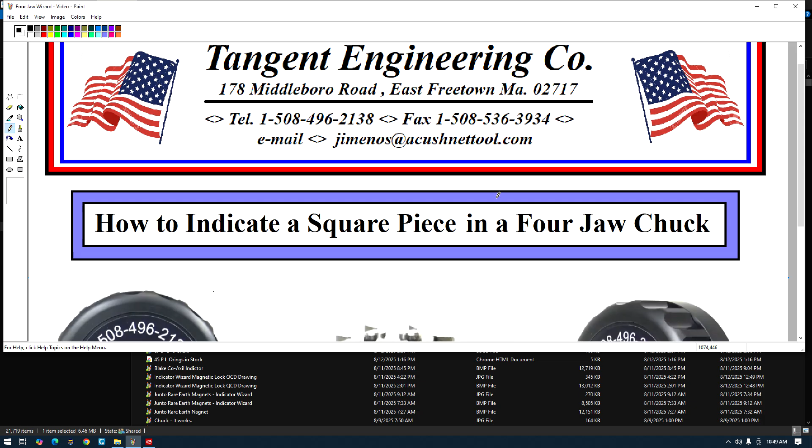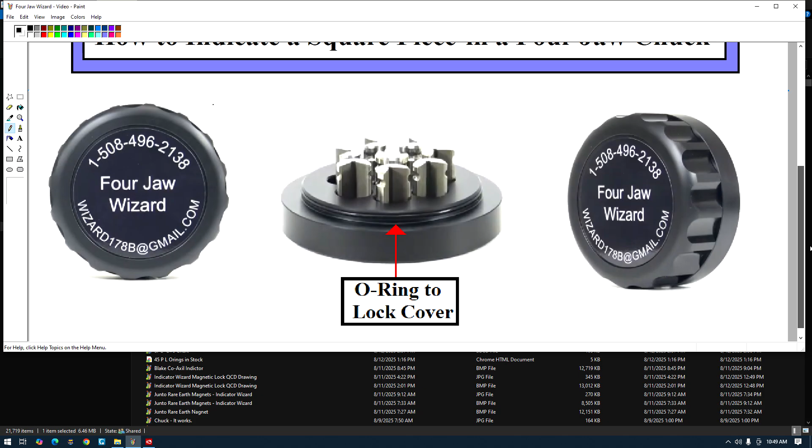Alright? Well, about 5 years ago, I developed this little product and I went to sleep on it. I put it to bed. Other shit got in the way and it laid on a back burner. Here's what it looks like. This may entertain you, right? I got a friend that I interact with. I sent him one of these, and I made a video so he would understand what the hell it was. What I'm going to do is play that video for you, and it may entertain you. All right?

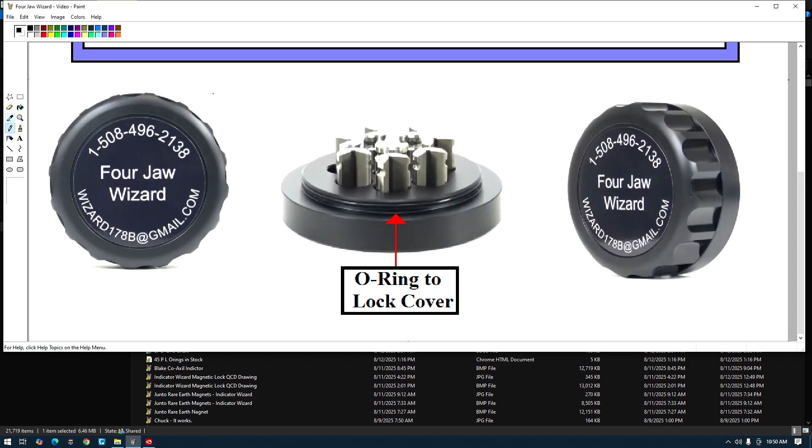Okay, we're off and running. Watch this. Hey, Doug, you'll never guess who this is. Take a look at that ugly motherfucker, that picture there. It's your buddy, the Grand Poobah. I just want to sign in. I'm going to lay some shit on you, okay? Hang on.

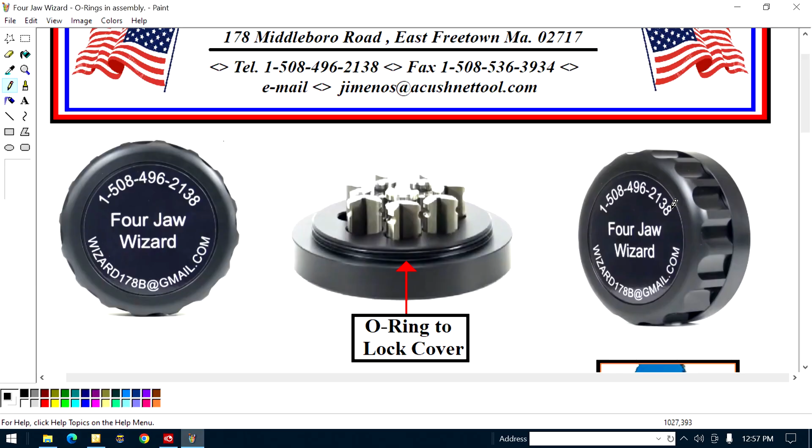Alright, I'm going to be sending you something we never talked about, alright? I know you're a tool junkie, right? You can see on the left it's called Four Jaw Wizard. I got 3 views: top view, an angular view, you can see them grippers there. There's a bottom half and a top half. When you take the top half off, you got these bosses in there. You don't know what the bosses are for right now, what they look like. I'm going to elaborate. Let me just blow this up.

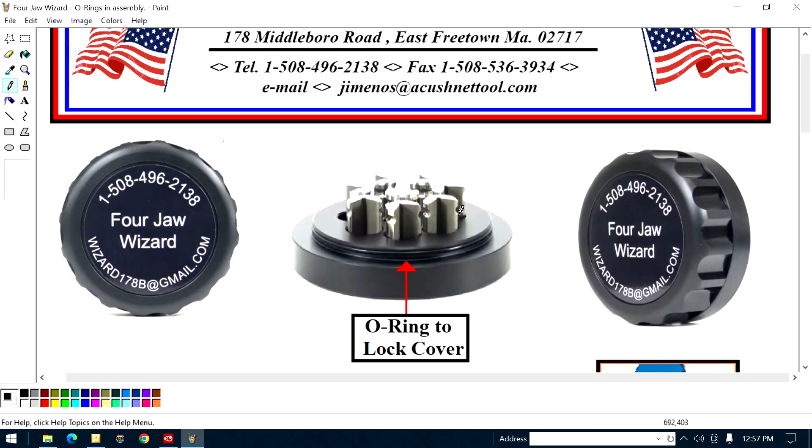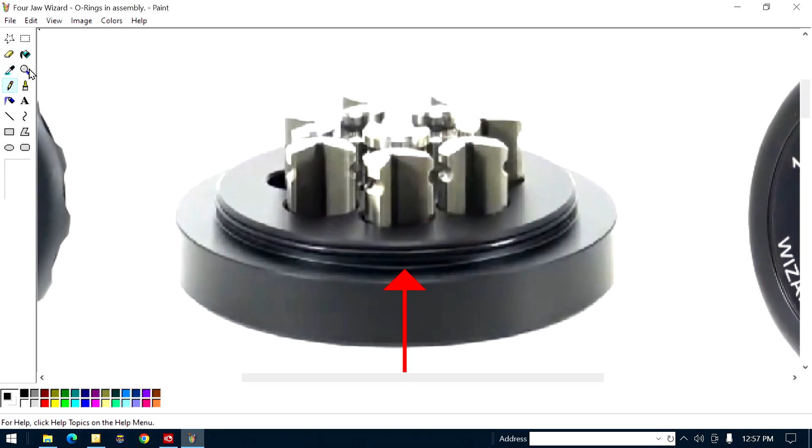All right, first of all, you see there's an O-ring in the bottom half. See, I got it highlighted. Why is the O-ring there? When you put the cover on, it stays on tight. The rubber compresses and holds it on so it don't fall apart and the bosses don't fall out. Sounds dumb, but that's what it is. Alright. Let me go over here. Let me blow this up. Well, it's too big. Let me blow it down.

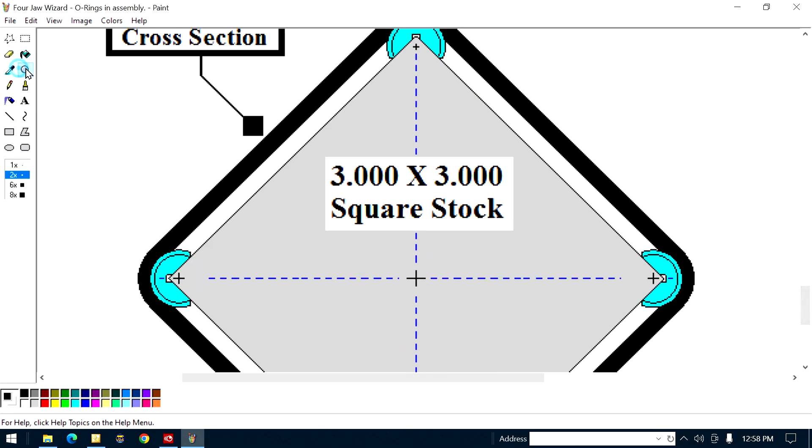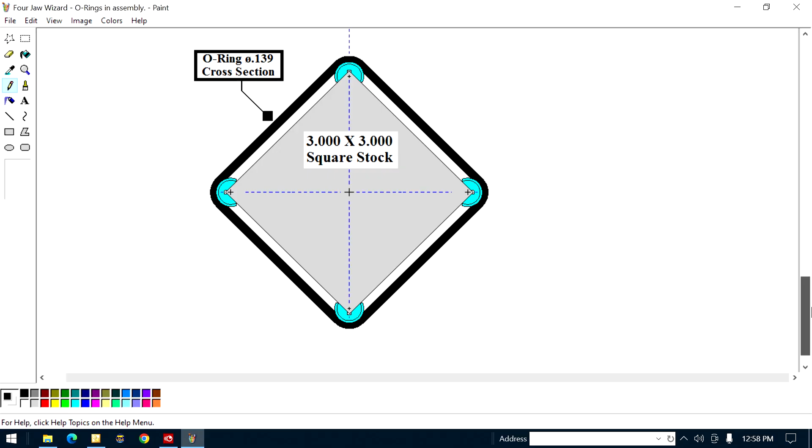When you're in a four-jaw chuck, this obnoxious tool is for when you want to put a piece of square stock or rectangular stock in a four-jaw chuck and get it running true. There's a lot of ways of doing this. This tool makes it a little easier. You see it here? What you got is them 4 bosses. I'm going to elaborate. And you got an O-ring. What's the O-ring for? The O-ring is to hold the bosses on the corners. You see it? Alright? Let me go over here.

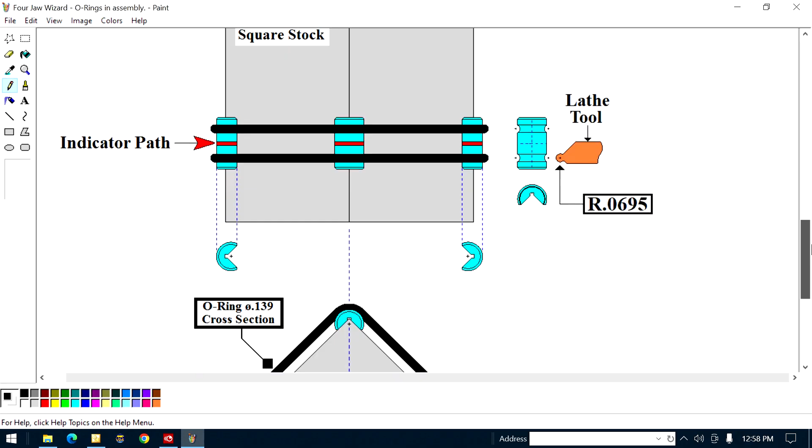You see them blue things? Them are the bosses. Right here. See? Let me blow it up a little.

I'm doing a lot of blowing. I should have been a fucking queer.

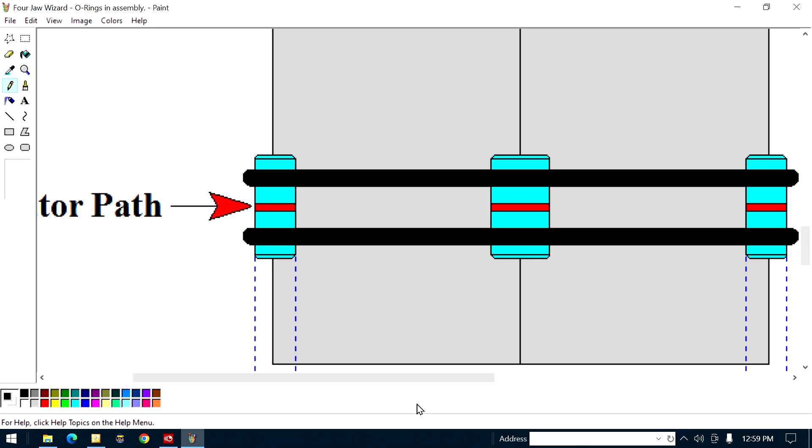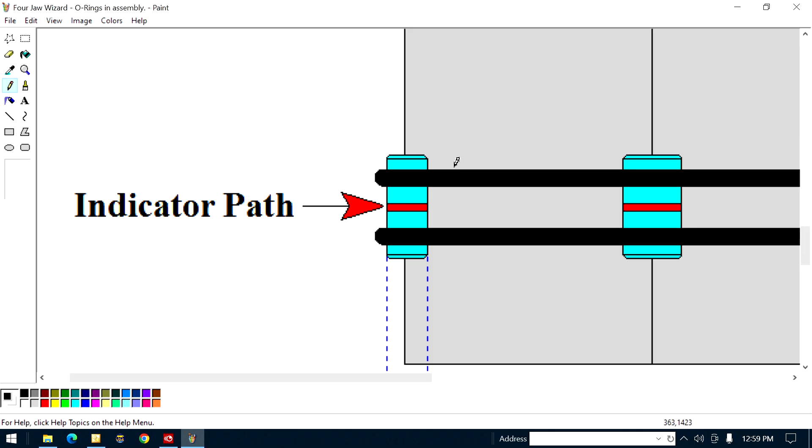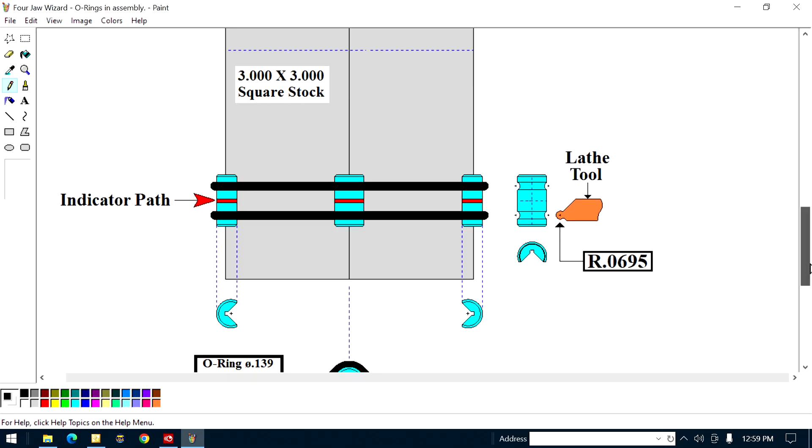Here we go. Alright, you see that boss there? I'm going to project it up. See it right on the top? There's 4 corners on a square. I'm showing 3 here. When you put them bosses on, see it says indicator path? Obviously, you rotate and that's where your indicator goes. These are held on, right? And you indicate it. I'm making it symmetrical. You wouldn't use it like I got it shown here. But you see what the boss looks like when I blow it up again.

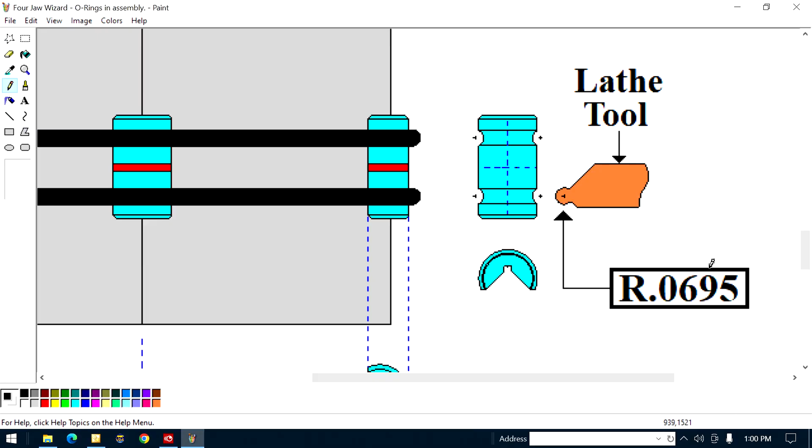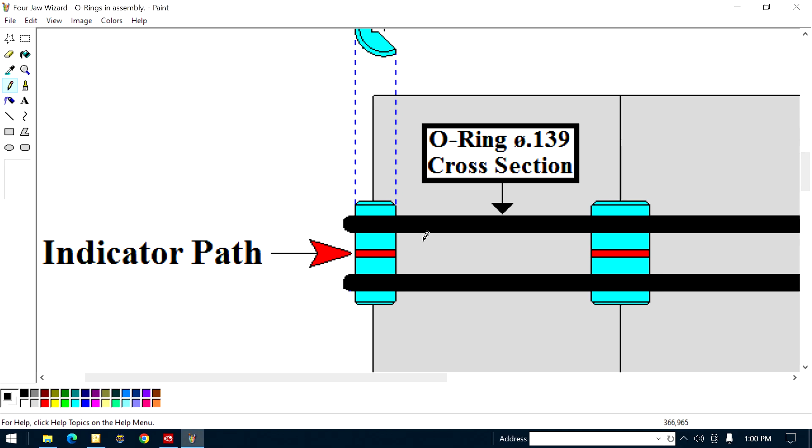The boss looks like this. It's round, right? It's got a 90 cut in it, right? And if you look here, it's got an O-ring groove. The radius is .0695. Why is that? Because the cross section is 0.139, right? .0695 is half of .139. So that radius accommodates the O-ring. You can buy these O-rings in different lengths, but with the same cross section. So when you're doing stuff, you got a handful of them. They stretch and they're forgiving. You understand? All right. Let me see what the fuck I'm doing.

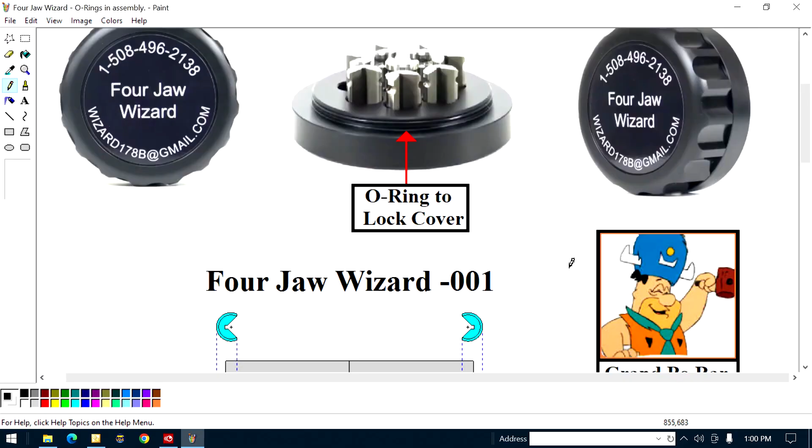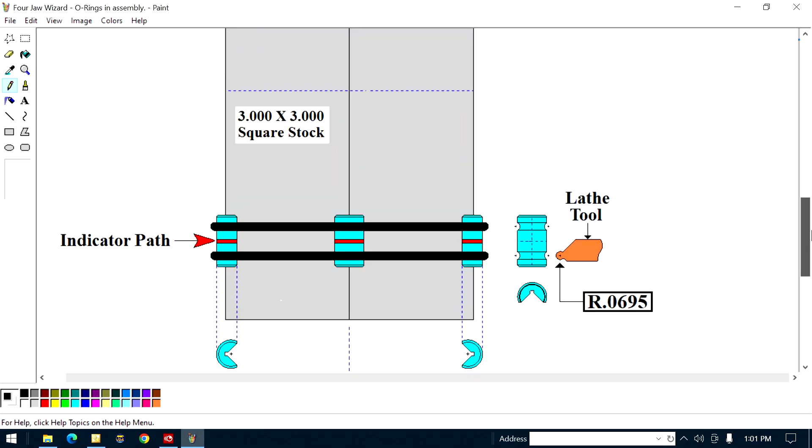Let me review that. Well, I'm going to be sending you one of these, right? I know you're a tool junkie. You'll get your rocks off over this. How often you indicate square stuff? Not too often. How often you going to use it? Not too often. But you may find applications for this for other shit. I hope this is clear enough for you. But that's all I got. How do you like them apples? I'm going to put it together with your quick bore kit, and when it shows up, at least you'll have an idea of what the hell it's all about. All right, guy? I'm out of here.